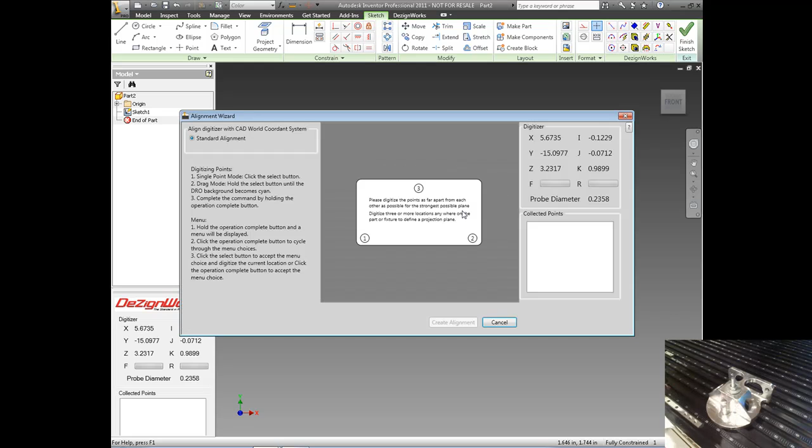We're going to first create alignment. This can be done by selecting the base plane and picking as many points as you'd like. One of the great things about this version, most DezignWorks commands can be run completely off the arm. We call this our new mouse free.

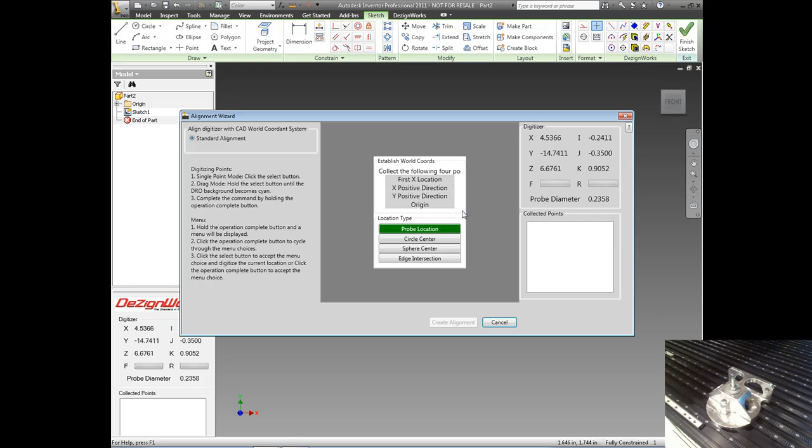Now we're going to go ahead and define how we want to align this part to the Inventor coordinate system. I'm going to make X across the front by selecting 2 points. We'll put Y in the middle. And for the origin, I'm going to go ahead and use the center of this round piece.

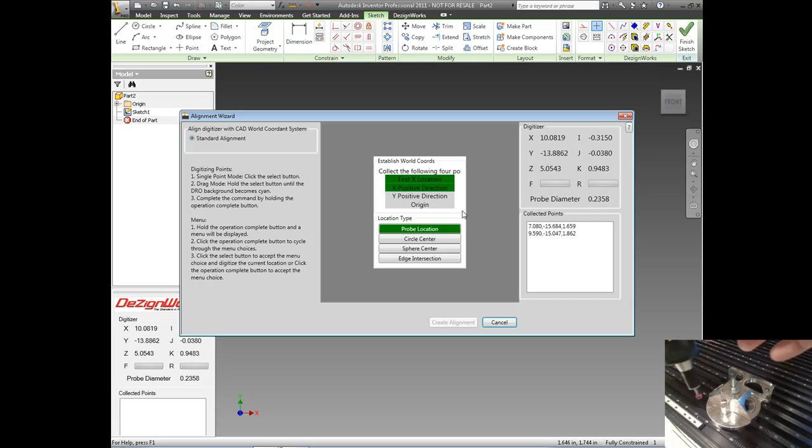Notice again, all the tools can be done right directly from the arm. If I want to change something, I can change it. I'm going to go ahead now and go to the origin, toggle through, and I'm going to use at least 3 points to pick up this center of this area. I can have more than 3.

So now we've created our alignment, and we've automatically created a sketch.

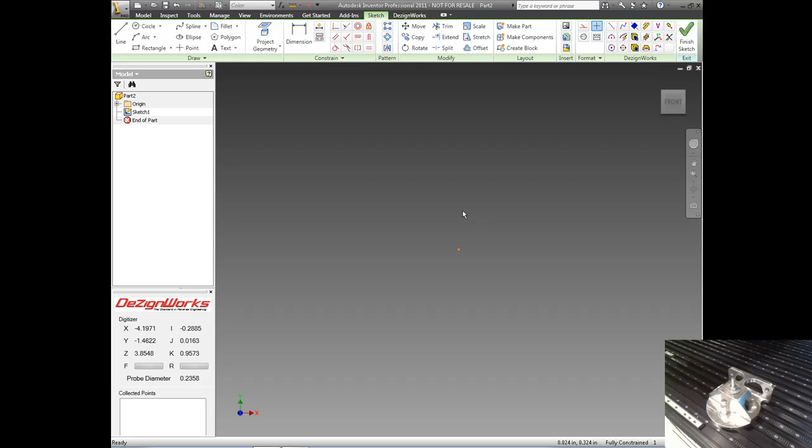DezignWorks can be run now from the new ribbon or directly from the device. In this case, it's a Romer. So we're going to go ahead and toggle the button on the arm.

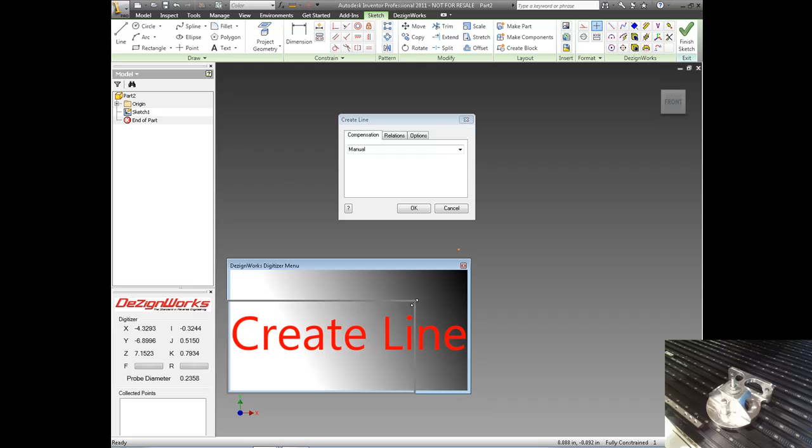You're also going to notice a new heads-up display. So if I'm 6 or 8 feet away from my monitor, I can make this as large as I want. This is our new heads-up display with our new mouse free.

All the compensation can be done automatically. You can also use relationships, and you have choices for dragging.

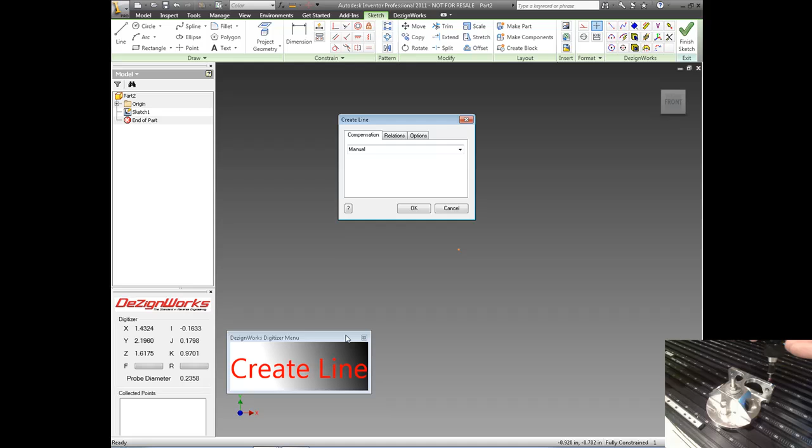So we're going to simply go ahead and start drawing this the same way you would draw with Inventor using your normal tools. So I'm going to create a line across the back. You can use as many points as you want.

And you're going to start seeing our data. Now again, this is all Inventor native data. So I'm going to go ahead and outline around here.

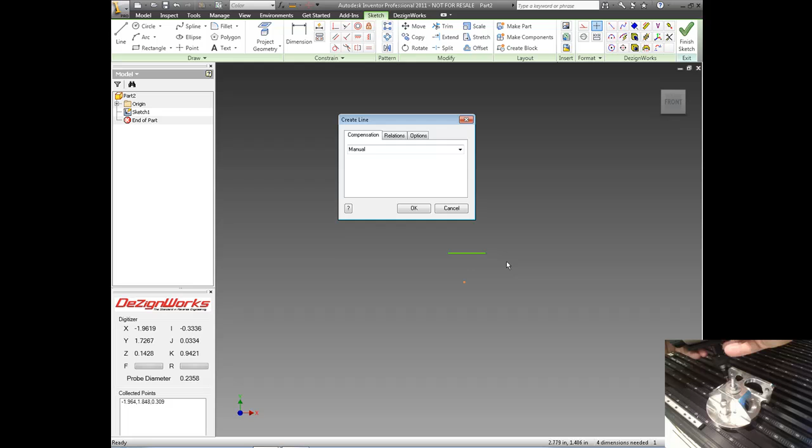And actually this also could be mirrored. To show you the full usage, we probably won't mirror this, but you can use all the tools directly inside Inventor. Notice how I can toggle through the commands. So again, all mouse free.

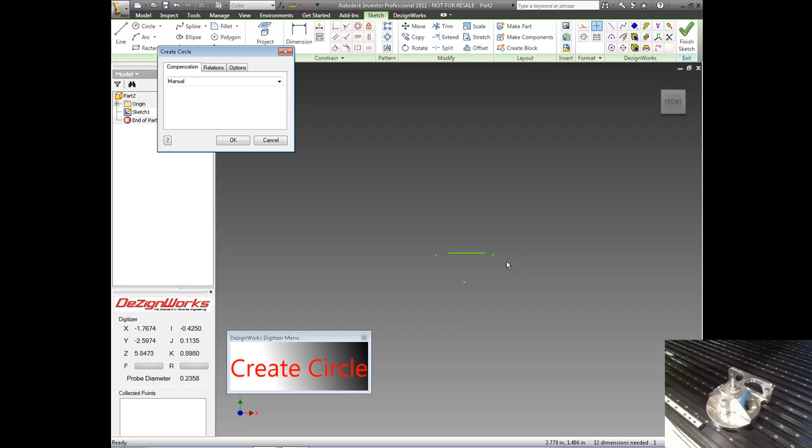I'll go ahead and create this circle on the front. And again, maybe I want to lock it down. I could on the fly go ahead and actually make a fixed relationship. So I know I want this locked down. And again, I can take as many points as I want.

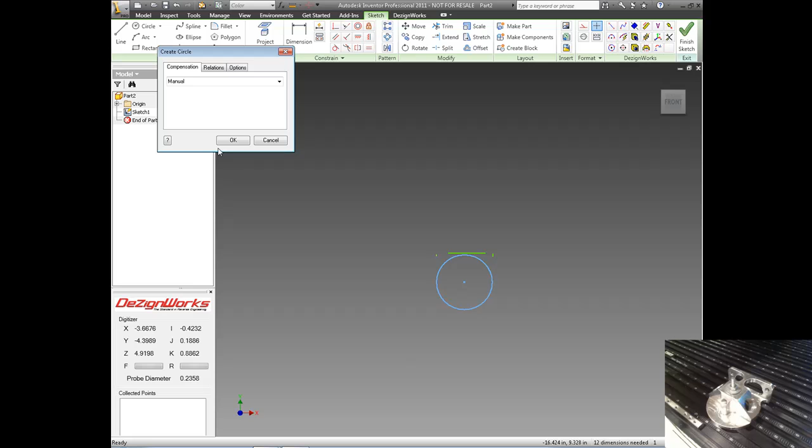I've got to constrain. If I want to change that, actually there's some more areas I want to work on. There's some small radiuses in here. I'm going to need to use the constraints of Inventor. I'm going to go ahead and grab those areas.

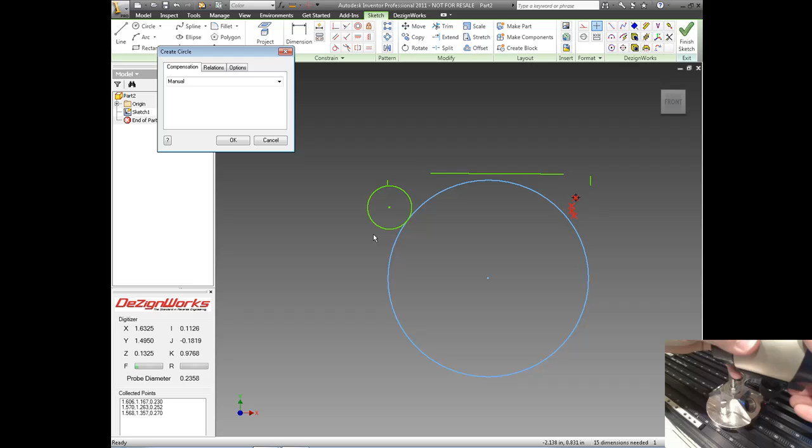Again, I can take as many points as I want for my data. So I'm building this very similar to the way you would normally with Inventor. The key to Dezignworks is very, very easy to learn. So you can see we've actually created our outside profile.

So we'll simply go ahead and use Inventor tools. And we're going to extend this over here. And we'll do the same over here.

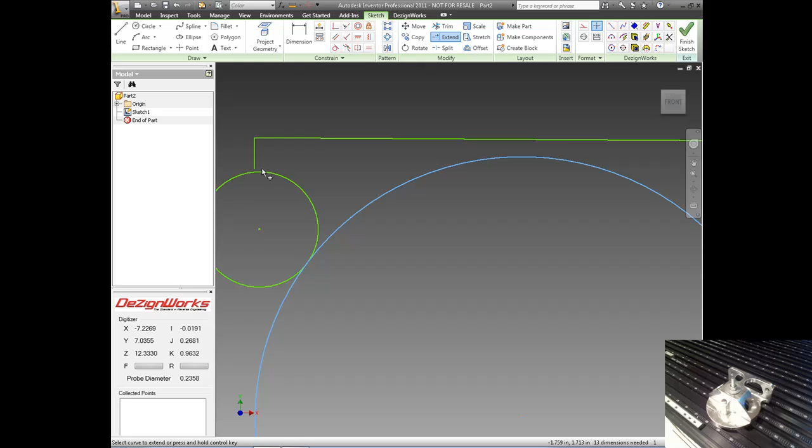Now we'll use all the constraints. And we'll go ahead, since we already fixed this, let's go ahead and make these tangent. So we can trim it and we'll go ahead and extrude. So we'll go ahead and use the Inventor constraints. And we'll just use tangent.

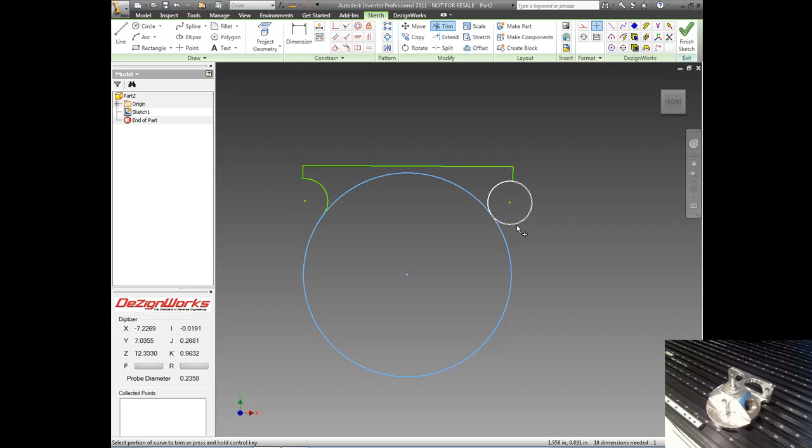So now we can go ahead and we can trim all this up. And now we use Dezignworks to extrude this.

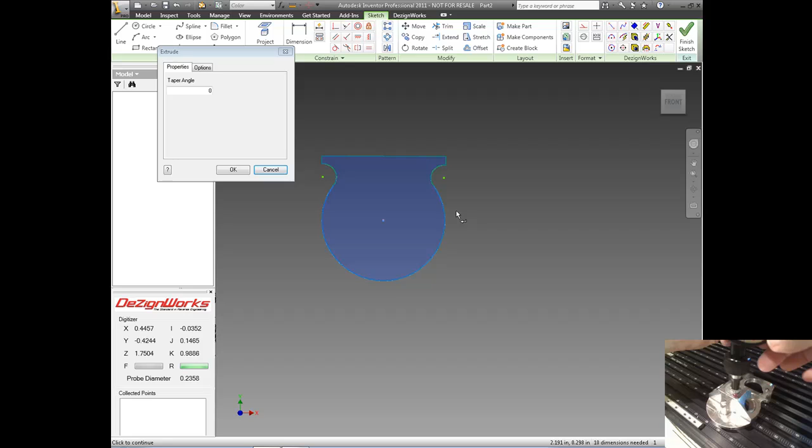So let's jump right into the extrude command. Same way you would work with a normal extrude in Inventor. Highlight the area you want to extrude. Hold the device at the height. And there you go. We have our outside of our part.

Now let's go ahead and start cutting this away.

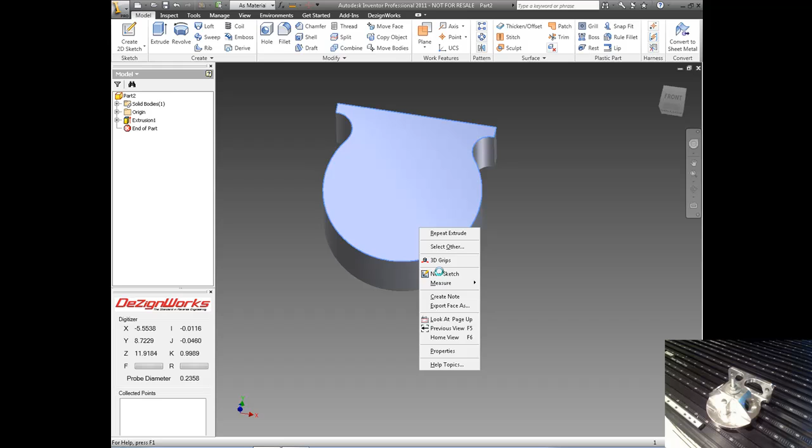So we can simply pick this face and we'll start a new sketch. You can interact. If you knew you wanted to draw with Inventor, you could draw lines, arcs, whatever you want on top of this. I'm going to go ahead and actually just start making a cut around this area.

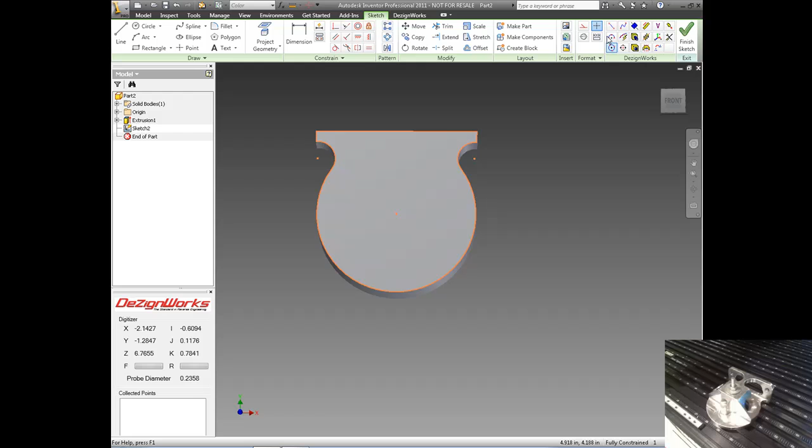So I'm going to use Dezignworks line tool, and again, Dezignworks can be used directly from the device or the ribbon. So make a line across here. Then go ahead and we could just use the fillet tool, or we could make a round here.

So let's go ahead and we'll go ahead and maybe make this circle. I'm going to make this fixed. That's a nice thing. You can add all your constraints right on the fly.

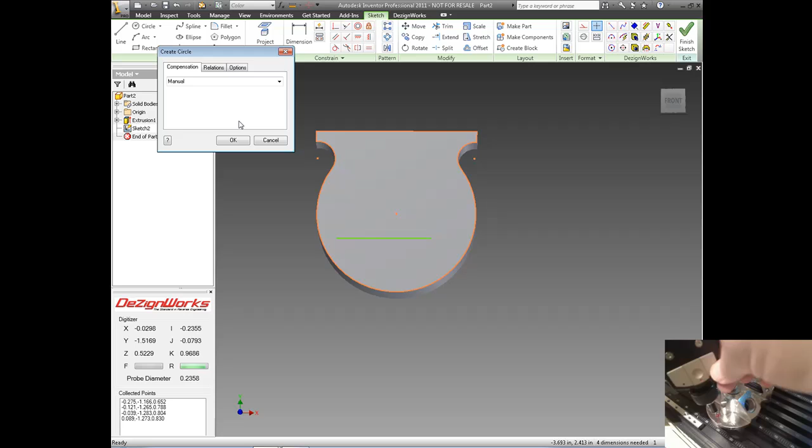Now maybe I don't want that constrained, so I get this little area in here. Very easy to use. And again, we could have mirrored all this, but we want to show you the full extent of using Dezignworks.

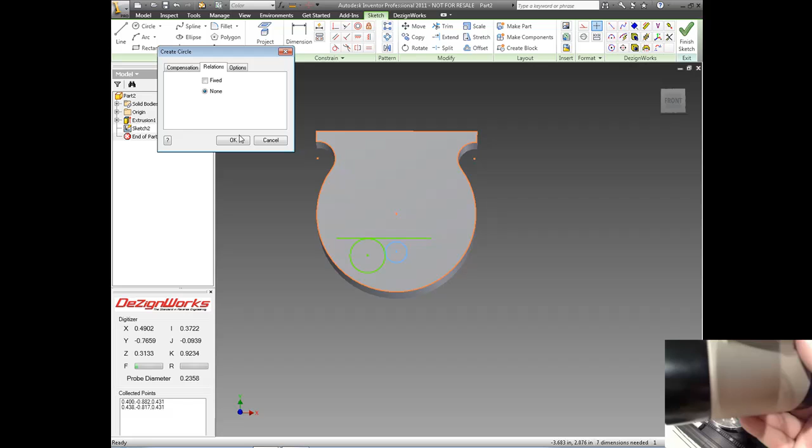So again, now we'll just go ahead and simply use the constraints, and we'll make them tangent. Now that we have it all constrained, we'll just go ahead and trim it.

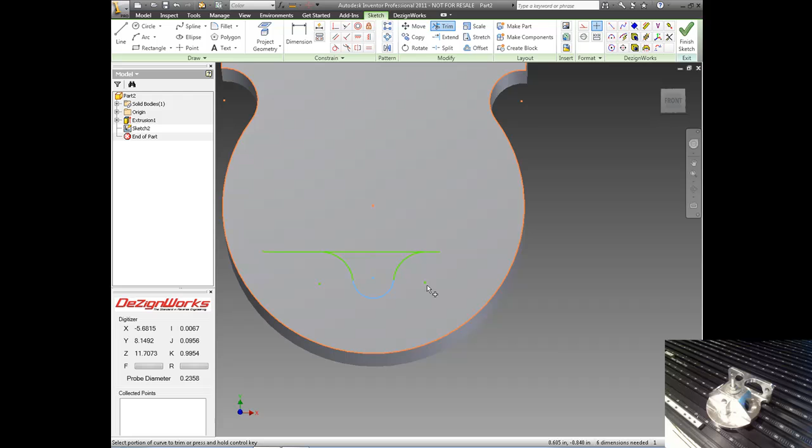And we can go ahead, and this can be done two ways. We can extend this out to this border, or you can draw with Inventor. So the nice thing about this is if I go ahead and use the tools right directly inside Inventor, you'll notice this will inference everything I already drew with Dezignworks.

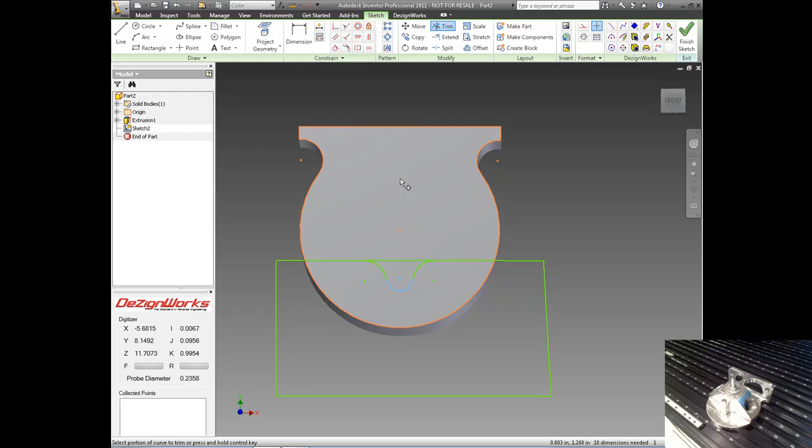So I'm going to do this cut, but again, I'm showing you this how I can inference all the geometry that was created with Dezignworks. Now we'll simply just trim this out, and we'll go ahead and we'll use Dezignworks, and we'll do a cut.

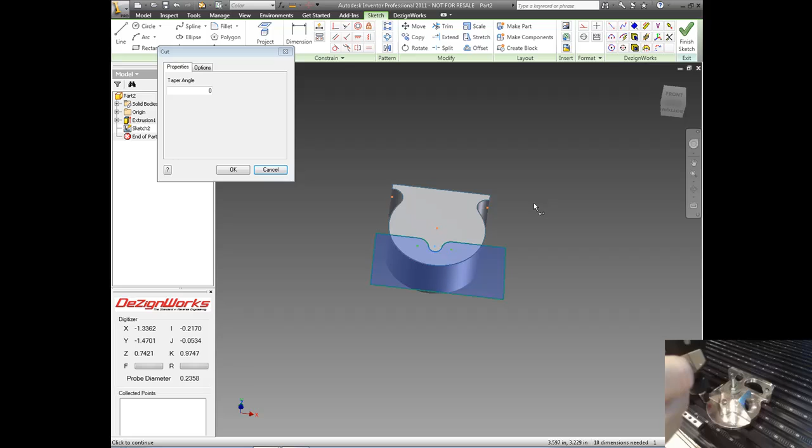And again, we're just going to highlight the area we want to cut out, and we'll say cut down to this area. We're going to go ahead and save our part.

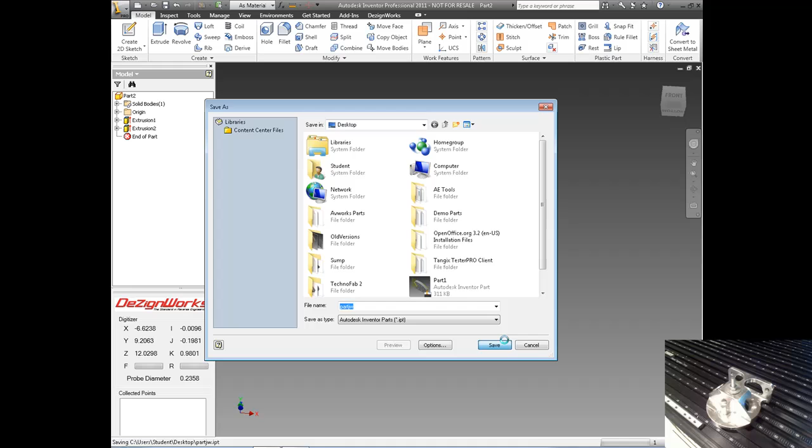Because we want to show you a new tool that we just introduced for Inventor. As you're working, a new tool has been introduced to Dezignworks Inventor, which is a validation tool. So I can simply come up to the Dezignworks ribbon and select the V, and it's going to give me some information: surface to inspect and distance, surface and solids.

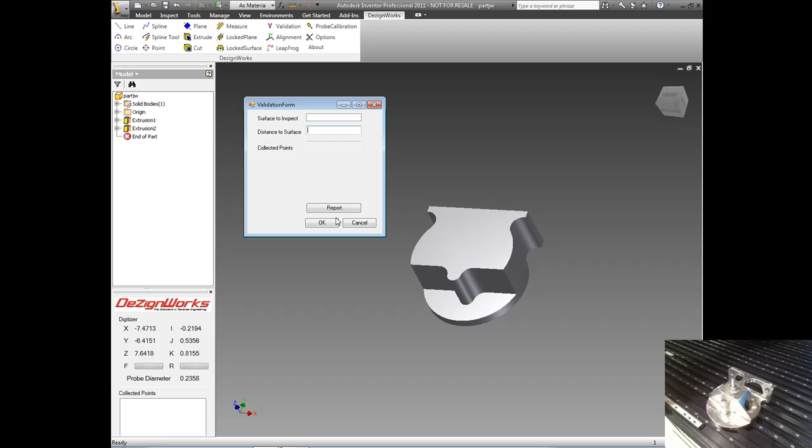So if I want to go ahead and see how this height's working out, I can simply pick a face. In this window, I simply hold the probe on the face. It tells me my deviation from distance to the part. This will be as accurate as the device. In this case, we're using a Romer, which is very accurate. You can pick any face you want.

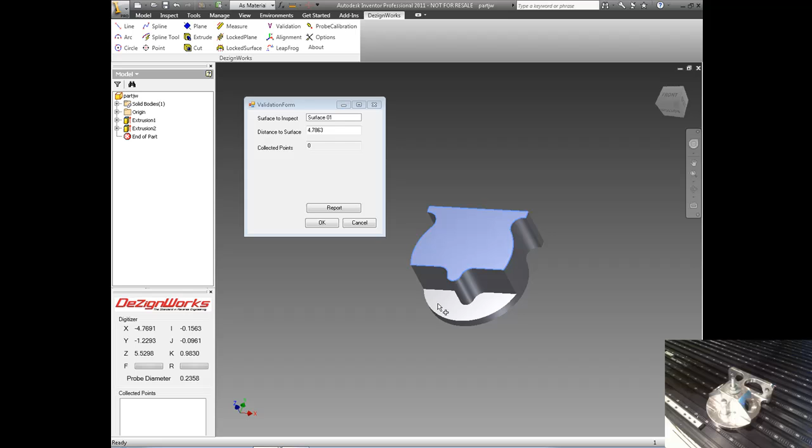It's a great tool. Gives you the information that everything you're doing is correct. Just like on the front of this, we assumed that was an arc, but is it? Let's pick this face. Let's check it.

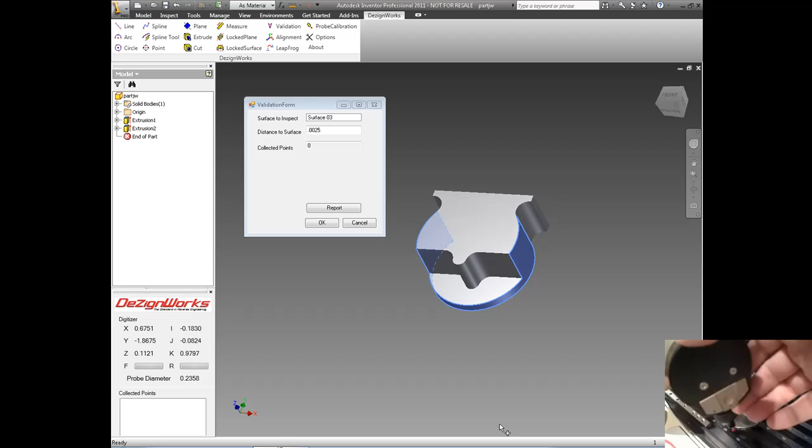You can also generate a report by simply collecting data. We'll use this tool again a little later as we progress in the part. But again, this is a new DezignWorks validation tool. Gives you the option to validate your data as you're making the part directly inside Inventor.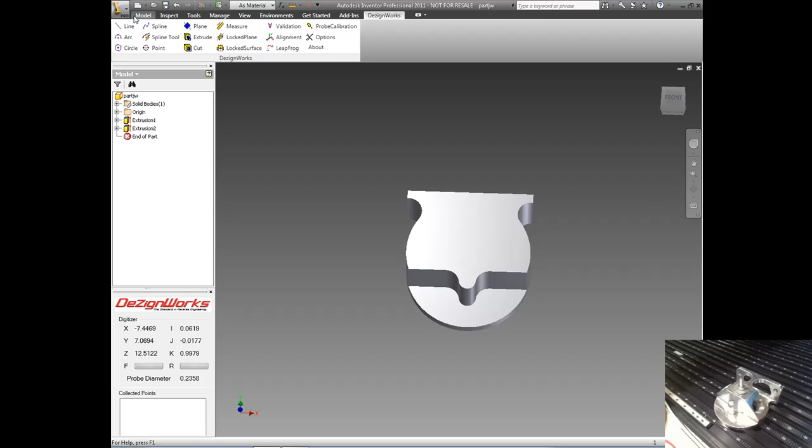Let's go ahead and we'll cut these areas off of here. So again, we're going to simply make a plane. We'll go to the Dezignworks ribbon. We use the plane tool. We're going to go ahead and take at least 3 points to build this plane.

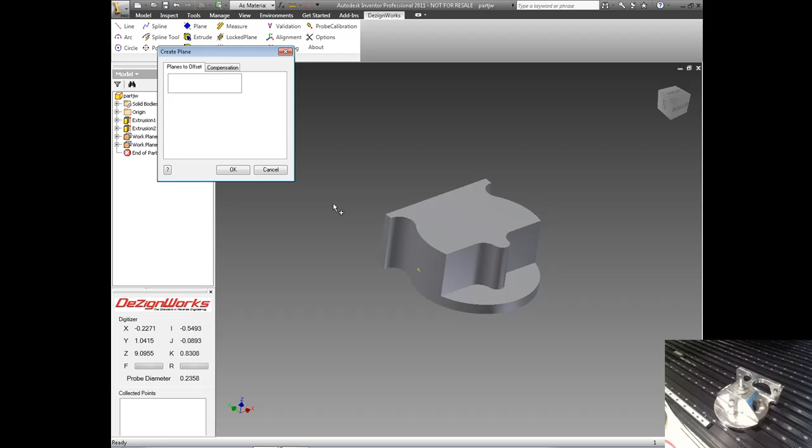And while we're here, we'll go ahead and build one on the other side. Again, notice I'm using all the commands directly off the arm. These planes have been added to the feature tree, so I can simply pick one.

And to cut this off, we're just actually going to use the Inventor tools. Once I pick the plane, I'm going to start a new sketch. And since the plane's normal to that, I'm just going to simply use the Inventor tools to actually make a cut down through here.

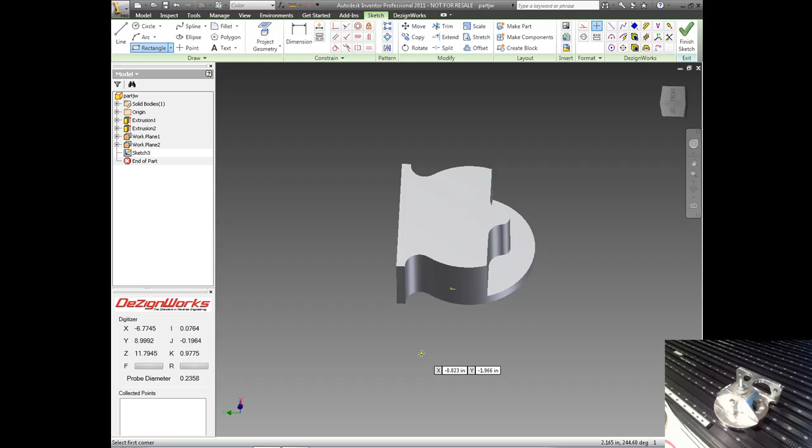I'm going to position it somewhere close to the center of that slot. I'm going to simply go ahead and cut it off. Just come up here and we'll do a cut. Very simple. As you can see by now, if you're an Inventor user, you're saying, hey, I can use this. Let's go ahead and modify this since I wanted to do a cut.

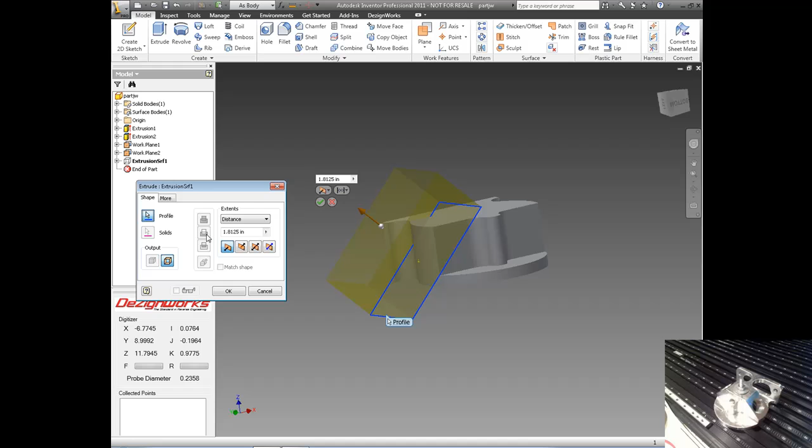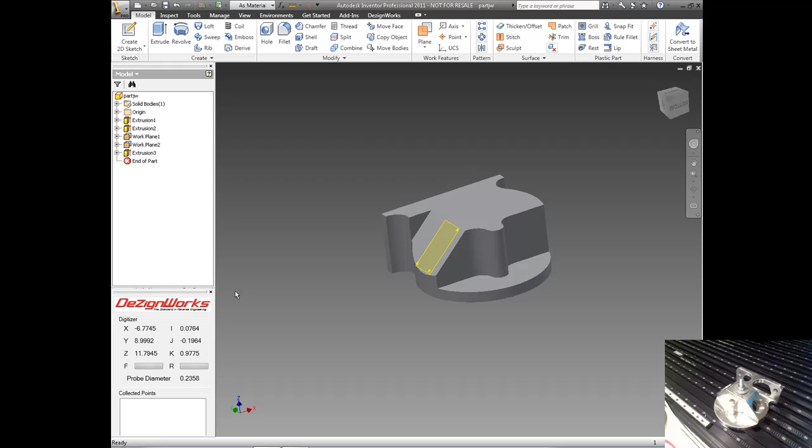I'll go ahead and recut that. There, we've cut our face off. Let's repeat and do the other side.

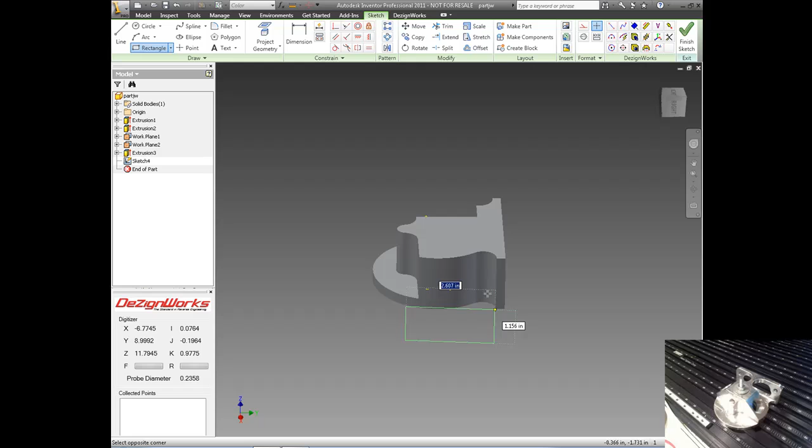We'll simply go to the work plane and start a new sketch. Again, I'm just going to use a simple rectangle tool, having it start outside this area and come up through somewhere in the center of this slot. Again, I'm simply going to finish the sketch, and use the Inventor tools in this case to go ahead and cut that off.

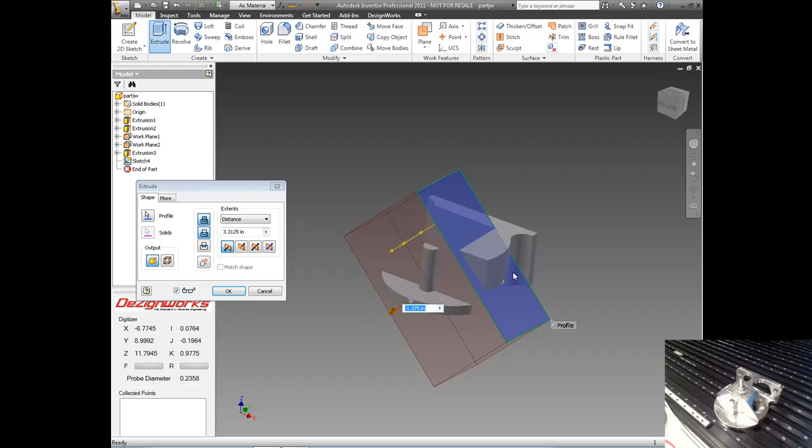Let's save our part.

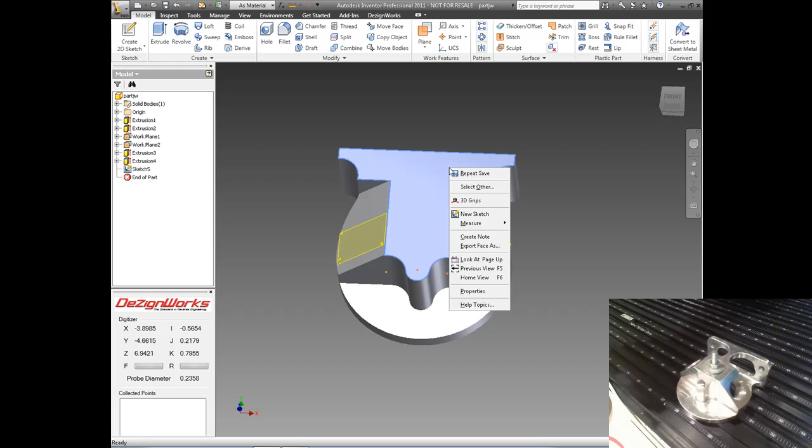Now we're going to go ahead and do the cutouts in this area here. So we're going to select the face and start a new sketch. We use Dezignworks to capture the area for these holes.

And we'll build this whole slot area. So we're going to go in here and we'll use the power of Dezignworks and do our constraint as we're digitizing. So we'll go ahead and do this hole. Again, you can take as many points as you want for circles, lines, arcs, whatever.

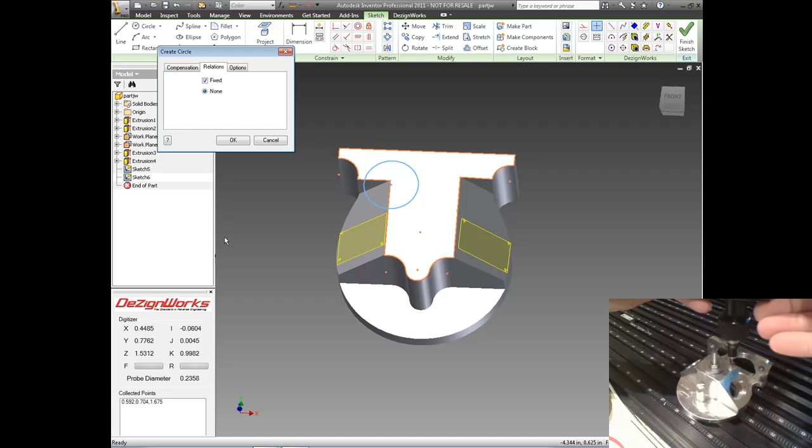The nice thing about this is you can go ahead and use Inventor to finish this. Because we know those circles are in this area, the lines have to be tangent. So we'll just go ahead and we'll take the Inventor tools to show you how you can inference with Dezignworks and Inventor together. So let's come out here and we'll draw this little area.

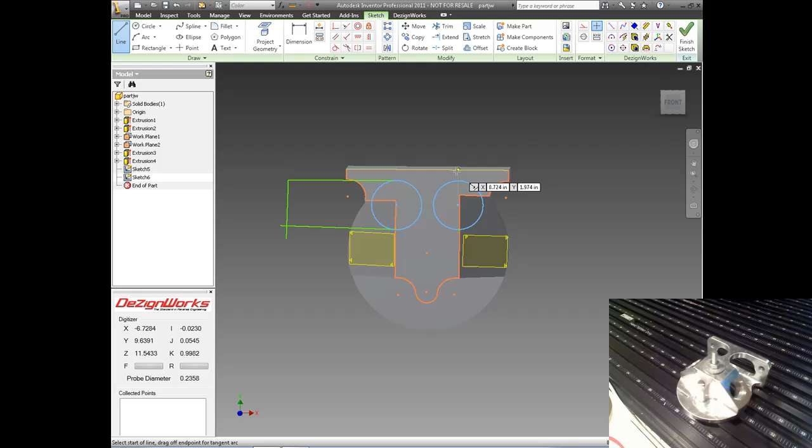Notice how it grabs at tangent. And do the same to the other side. Now again, we could have used Dezignworks and captured that area, but I want to show you how it will snap right to the Inventor entities.

Gives you complete control of your designs.

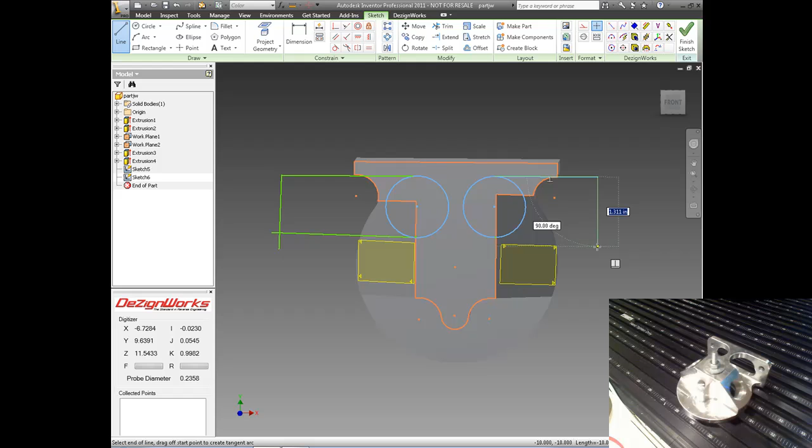This can be done several different ways. We could have digitized it, or we could have just made a line across there. Now I'll go ahead and use the Inventor tools to trim it.

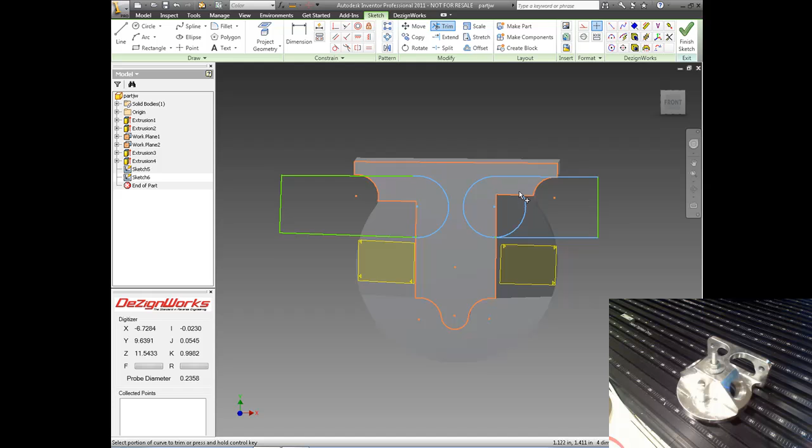Now we'll take Dezignworks. We'll cut that to our depth, our areas, and we'll use the digitizer to go down to this depth.

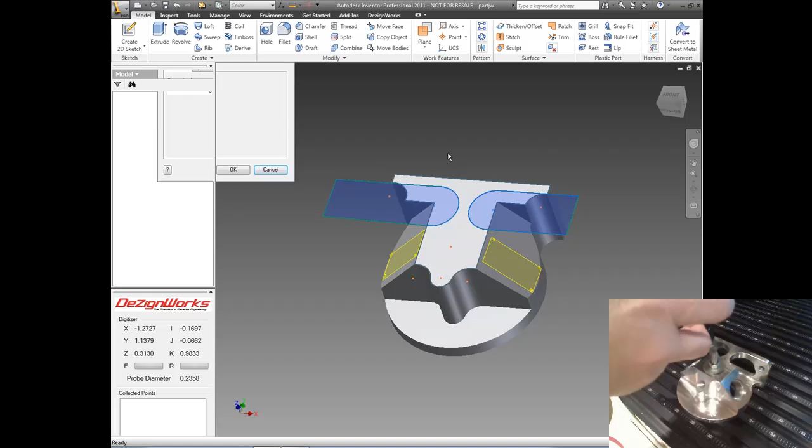So you can see in a matter of minutes how fast you can create parts.

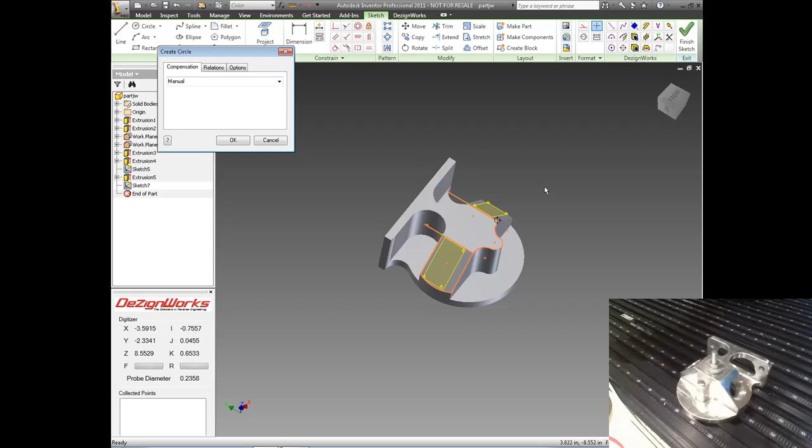Let's go ahead and put the holes in here. Simply pick a face and we'll start our sketch. Here's where you could just actually grab the center point by using Dezignworks tools, and then use the thread tools. So again, I'll come in here, just grab this area, and for detailing your prints, you can inference off the points.

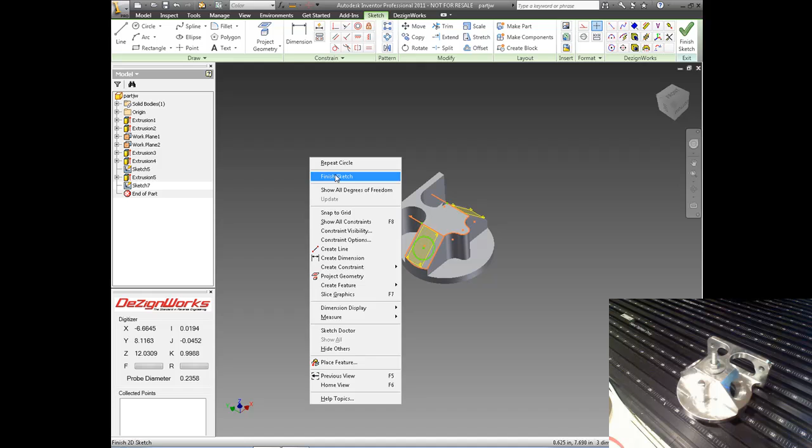And if you wanted to, you could either use Dezignworks or use the Inventor tools to do a cut through there. The great thing is, by already knowing Inventor, you already know 90% of using Dezignworks because the interface is identical. Pick a cut.

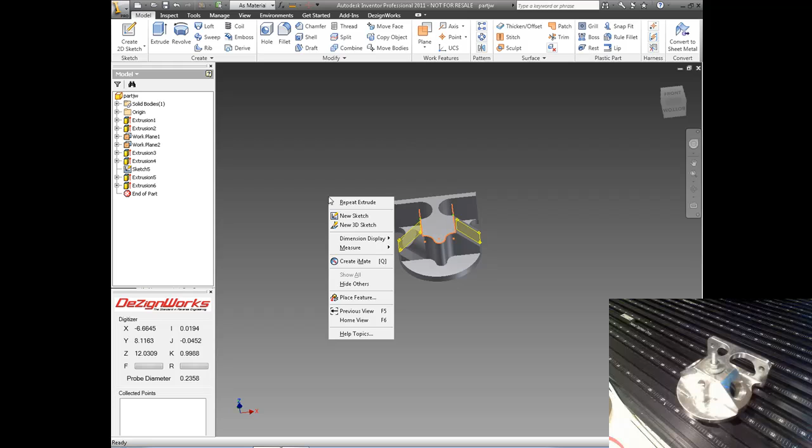And let's repeat for the other side. Just pick that face. New sketch. We utilize Dezignworks to capture the hole. And again, you may want to use the thread tools, so when you put this on your drawing, it gives the details of the threads.

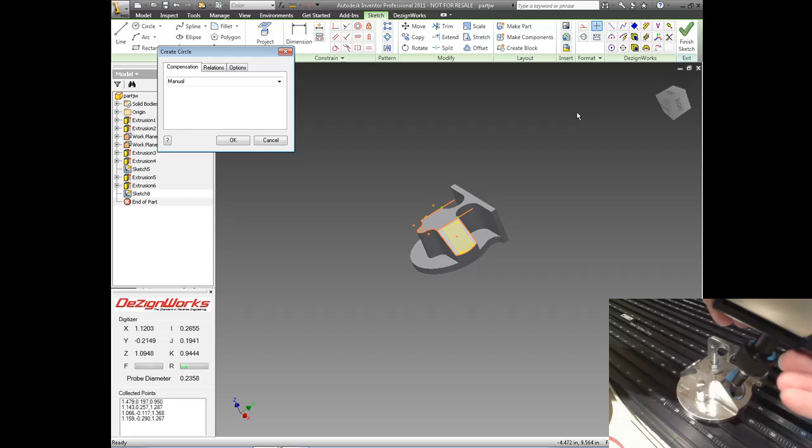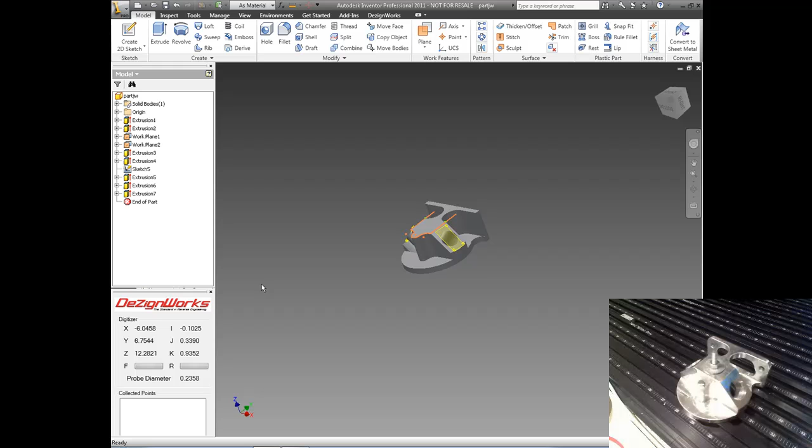And again, if you wanted to, you could use Dezignworks cut to do that. So there you have it. In a few minutes, you've completed your part.

Now that we have our model created, let's utilize the new Dezignworks Professional and use the validation tool. This will give us the feedback that we created the model that matches the part.

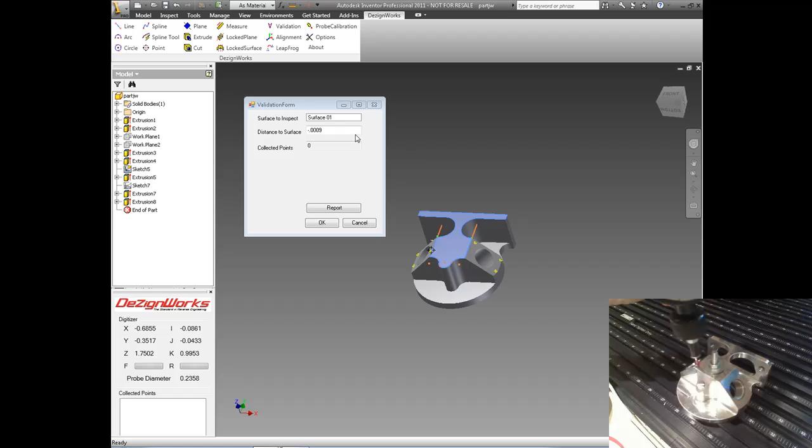Notice you simply select a surface to inspect, pick a face. Now for a quick check, you just simply hold the probe there. If you want to create a report, we can actually start collecting data.

So we'll pick that face and we'll take some data here. Then we can select another face and actually simply build a report.

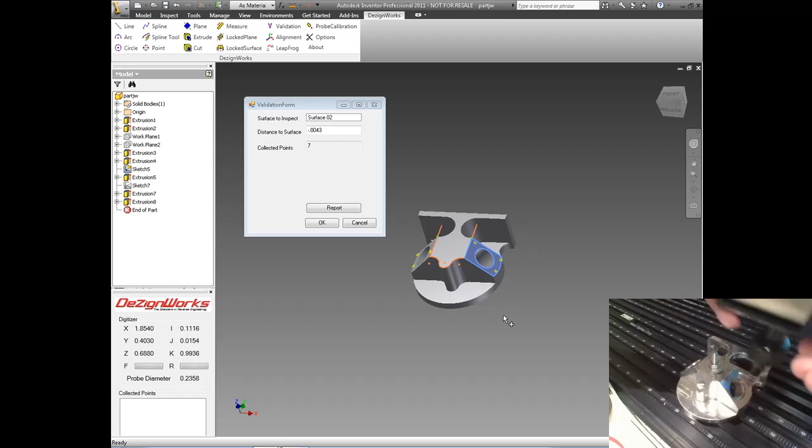Now again, this is not designed to be a full inspection. It's designed to give you the feedback that the model that you created matches your existing part.

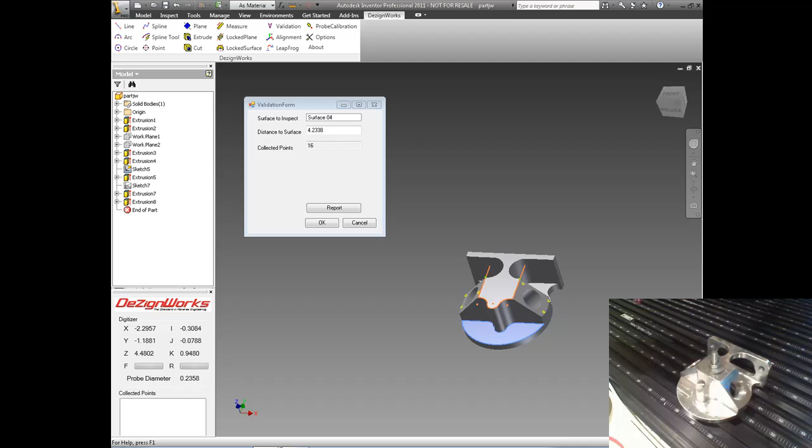So you simply pick faces, press the button on the device, and we can generate our report. So you can pick any face or surface.

So then we can simply create the report, and it'll show you each surface how well we did. So there's face 1, face 2, face 3. And this can be saved out.

So there you have it. You've used Dezignworks Professional, you've created your model, and now with Dezignworks Validation, you can now validate that the part that you have on the table matches your model.